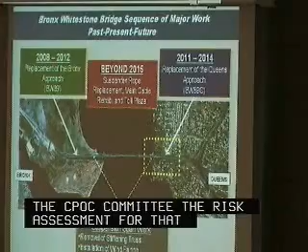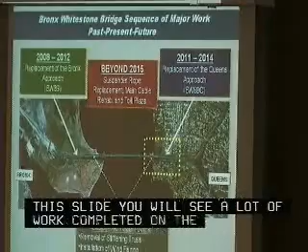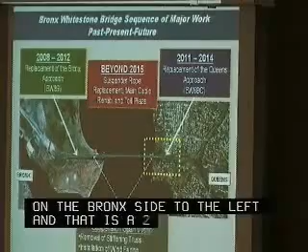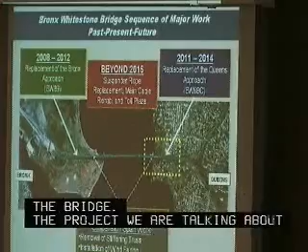First, some background on the capital program at the Bronx Whitestone Bridge, and just a snapshot of where we are. This slide illustrates where we've been in the past, what's going on right now, and where we're headed in the future. In the center of this slide, you see a lot of work was completed on the suspended span, the main part of the bridge, including replacement of the roadway deck, and other work related to reducing the weight on the cable, which was also very important for us structurally. Currently, you see the project on the Bronx side to the left - that's a $200 million project going on right now, replacing the Bronx approach structure on the Bronx side of the bridge. So the project we're talking about today is a very similar project, but on the Queens side of the bridge, in the area that's highlighted with the dashed lines.

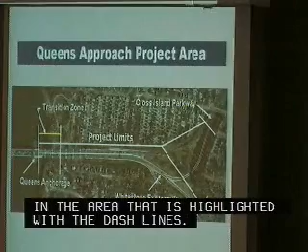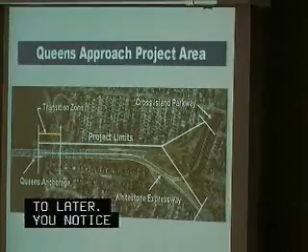This is an enlarged view of the project area. You see the project limits are bounded on one side by the Queens anchorage, and that's an important consideration because it represents a fixed constraint on the roadway width that is important in the staging and phasing of the project. There's a transition zone that's marked, which we'll get back to later. And you notice on the other side, the project limits interconnect with the highway system in Queens, the Cross Island Parkway, and the Whitestone Expressway.

A couple of things to note about this slide.

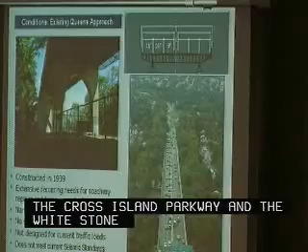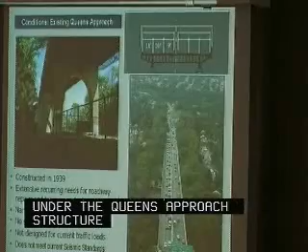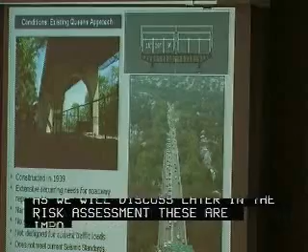You notice this is a shot of the current conditions out there. Under the Queens Approach structure, you currently have playgrounds, and you see a lot of trees and parkland on either side of the right-of-way. As we will discuss later in this risk assessment, these become important considerations that had to be addressed in the project, and indeed risks that have to be evaluated.

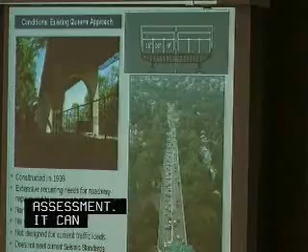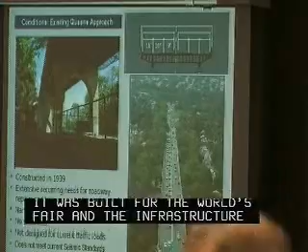And you see the bullets basically give you an overview on the need to replace the structure. It's a 1939 structure, built for the World's Fair, and with aging infrastructure everywhere, we have these kinds of problems.

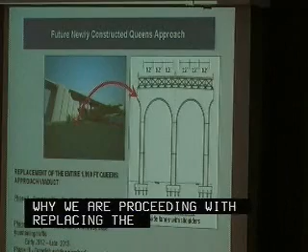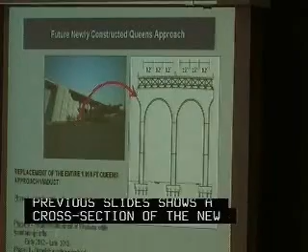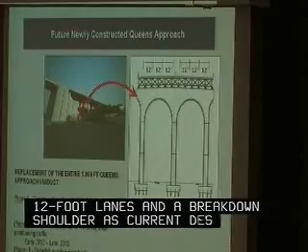This slide, in contrast to the previous slides, shows a cross-section of the new structure. You'll note it's a wider structure, without the lane width limitations. You have standard 12-foot lanes and a breakdown shoulder as per current design standards. You have a double-arched pier substructure system, which provides additional redundancy and resiliency to the structure.

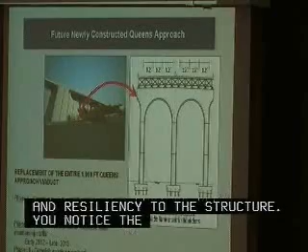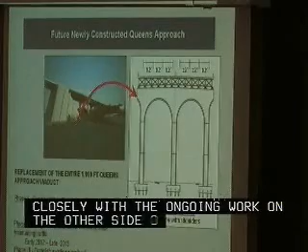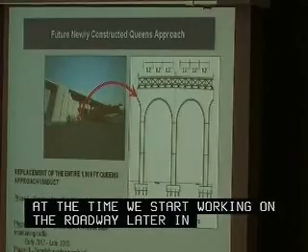And you notice the phasing of the project. It dovetails very closely with the ongoing work on the other side of the bridge, in that Phase 1 is really off the roadway underneath doing substructure work. By the time we start working on the roadway later in 2012, we'll be done with roadway work on the Bronx side of the bridge. And then we finish up with some site restoration work in 2014.

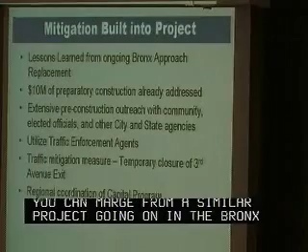So obviously this is a complex and challenging project. There's quite a lot of, in a sense, using the risk prism of looking at things, a lot of risk mitigation already built into the project. That's really where we've incorporated lessons learned, as you would imagine, from a very similar project going on the Bronx side. So in a sense that's an inbuilt mitigation already captured in the bid documents themselves.

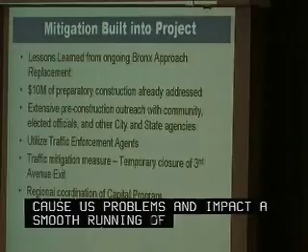The next bullet refers to some work we've incorporated in the project. On the Bronx side, the ongoing project, we've incorporated about $10 million of preparatory work on the Queens side, and that's really to address our concern about one of the major risks of dealing with this aging infrastructure: once we start saw cutting the roadway deck and doing some of the other demolition required for phased construction, there's a risk that the structure itself may cause us problems and impact the smooth running of the project. So to mitigate that risk, we've done a lot of pre-work to stabilize the structure and make sure we can move ahead smoothly with construction once we start.

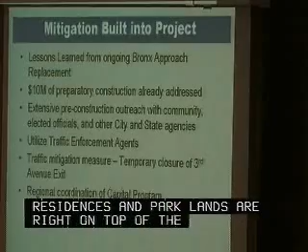Third bullet: as you may have noticed in the previous slides, the local residences and the parklands are literally right on top of the right-of-way. So obviously there's a big premium here on working very closely with the community to elicit their concerns and make sure those concerns are properly reflected in the contract documents. To that end, we've had an ongoing and proactive effort to work with community groups, community boards, civic associations, elected officials, and of course city and state agencies, most notably the Parks Department, which would be a big player in this project.

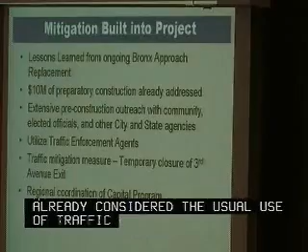And the last three bullets concern traffic mitigation, things we've already considered: the usual use of traffic enforcement agents to control the intersections of local streets, some temporary ramp closures, and the last bullet refers to the fact that these projects have really been synchronized with the work at the Throgs Neck Bridge, since this is really a common transportation corridor.

Next slide. Joe, I have an eye on the clock, so you're going to have to pick up the pace a little bit if we're going to get to the finish line. No problem.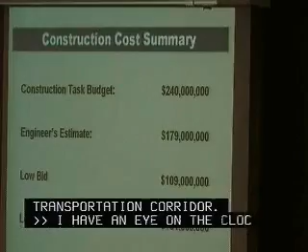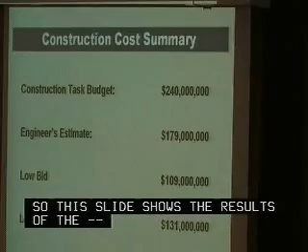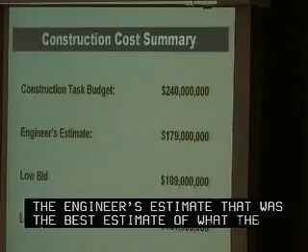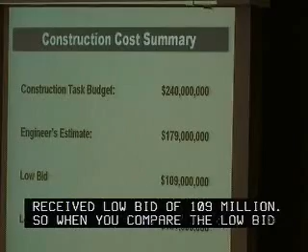And so this slide shows the results, the key numbers. The original construction budget was $240 million. The engineer's estimate, the best estimate of what the bids would be prior to bid, was $179 million. And you'll note the dramatically low bid we received, of $109 million. So when you compare the low bid to the budget, you see a delta of $131 million.

Normally we run these risk assessments prior to bid, so we have to deal with market uncertainty and a lot of other risks. Here we had the luxury, because of time, of running a risk assessment post-bid with the benefit of the bid results. And here you see the results of that post-bid analysis.

Basically, you see the low bid of $109 million, and we assessed the 80th percentile probability risk as a $21 million increase to the construction cost, and total project cost a $27 million increase.

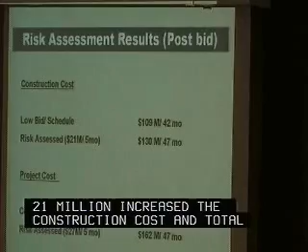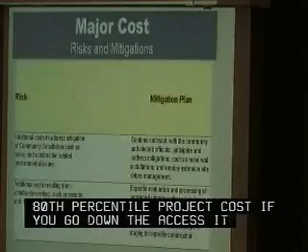As we move into construction, not all of the risks are mitigated. We will continue to have to deal with some of the risks that I spoke about. The outreach and proactive effort with community and local officials and electeds will have to continue to address potential issues that may come up, such as noise walls that the community may want built, more restrictive terms and conditions on the contractor for noise, dust and other nuisances. Our mitigation plan there is to be very proactive and continue to work with the community and elected officials and deal with these issues very timely.

Additional costs in general, the construction risks, security issues, regional traffic issues - these are other risks. Our plan to deal with these risks is to address these issues very timely, to stay on top of them, and to work very closely with all concerned to get prompt resolution, and make necessary adjustments to the phasing, staging, and traffic plan.

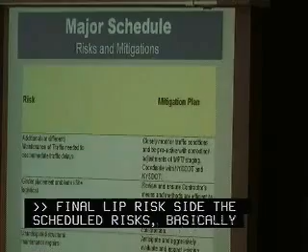And finally, on the risk side, the schedule risks, basically similar - the potential of impacts due to regional traffic issues. The second bullet refers to some issues we've encountered on the Bronx project, where the site logistics made it very difficult to pick and lift the new steel into place. So we're going to deploy a lot of the lessons we've learned on the Bronx project on the Queens side to hopefully mitigate that risk.

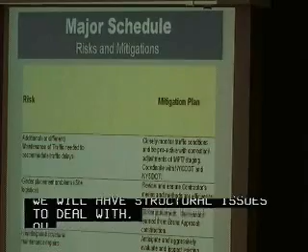And finally, as I mentioned before, we're dealing with an old and somewhat fragile structure, so it's to be expected we're going to have unanticipated structural issues to deal with. Our plan there is to be very proactive with inspection, monitoring of the structure, additional intensive biennial inspections, and so forth, so that we stay on top of emerging issues with that risk.

And finally, where we are today - we have the bid results, we've now completed the risk assessment. We're in the process of setting up the contractor qualification hearing, completing bid analysis, and hopefully within the next couple of months we'll be able to get this project awarded. Thank you for your attention.

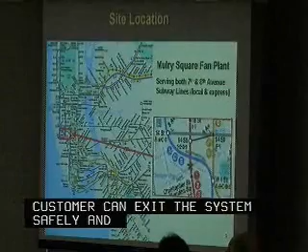This fan plant will cover two tunnel segments: the IND B division A, C, and E from 14th Street to West 4th Street, and the IRT A division number 1, 2, and 3 from 14th Street to Christopher Street.

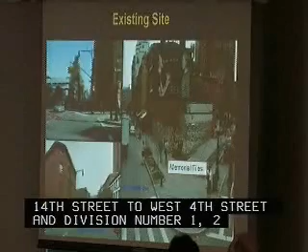Here is our fan plant site, the triangle area owned by New York City Transit, located at the southeast corner, Greenwich Avenue to the left, 7th Avenue to the right. As you can see, the top left corner is St. Vincent Hospital, which is across our project site, and down below is Greenwich Street looking north.

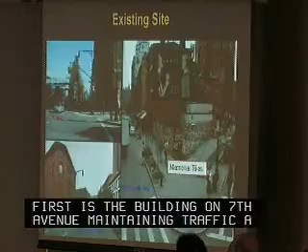We have a few challenges here. First is building the plenum, an underground plenum, both on Greenwich and 7th Avenue, while maintaining traffic at the street level as well as the trains down below. The plenum is the air pathway that connects the fan plant and our subway tunnels. This area is also a historical district, so we have many more challenges to deal with during construction.

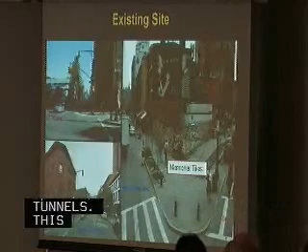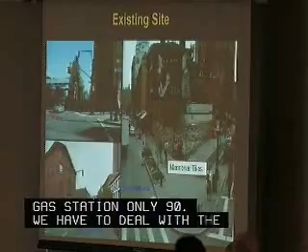This location itself used to be a gas station in the early 90s, so we have to deal with the gas stations and underground tanks, which we have to remove. You can also see the 9/11 memorial tiles, which we need to preserve, as well as the 100-year-old building with the billboard next to our fan plant site. The settlement of this building is something we need to deal with as well.

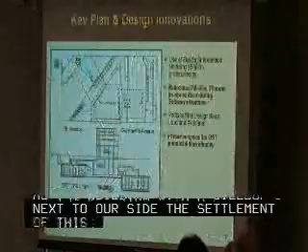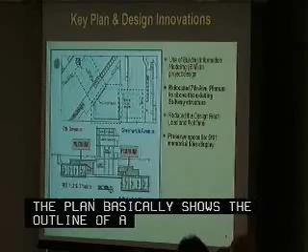Here's the plenum I just talked about. The key plan basically shows the outline of our construction. The fan plant is at the middle.

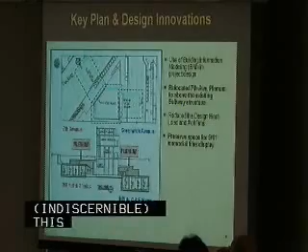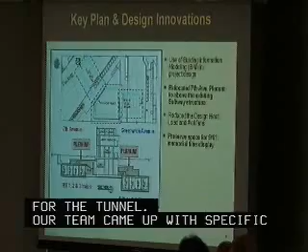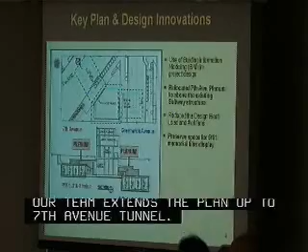The plenum is extended on both sides to serve the respective tunnels, both the IRT and the IND. This area is actually the high priority area for our IND tunnel. Our design team came up with very specific innovations, mainly the 7th Avenue plenum. The fan plant located at the middle is positioned such that we can pick up the IRT tunnel segments. Our team simply extended the plenum to 7th Avenue to cover the IRT tunnel. This gives extensive savings in terms of not having to have a separate IRT fan plant in the future, and it realizes significant savings in this project, which we'll see down the line.

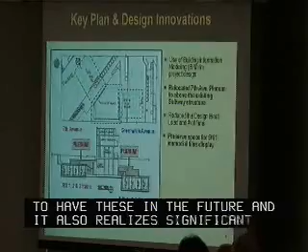Take, for example, testing and acceptance. It used to be a very difficult one. Now we have clear criteria in our spec. We have a shakedown process conducted by our commissioning group, supported by our user department. Also, the fan plant program is currently being done by in-house engineers.

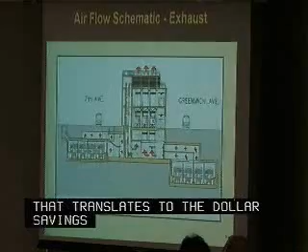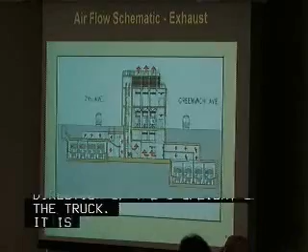Here is the purpose of the fan plant. You're looking at the air exhaust to the street; the opposite direction would be the supply to the track. The fan plants are controlled from the rail control center. Depending upon the location of the fire, the RTO can exhaust smoke from the tunnel or supply fresh air to the face of our customer.

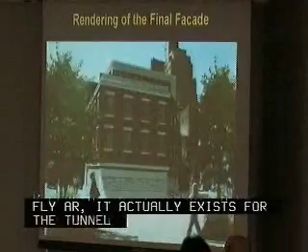Here is what the fan plant will look like once completed, from the street level. It's actually 30 feet deep and 43 feet high to match the neighboring buildings. You can see the provision for the 9/11 tiles here. This facade design was incorporated with input from the community, elected officials, as well as the Landmark Commission.

Last year, transit hired an independent consultant to do a risk assessment. We had a couple of kickoff meetings last year, followed by a couple of days of workshops, where all the stakeholders from New York City Transit, as well as representatives from MTA, attended this process. We wanted to confirm our confidence level to 80% on a project cost of $89 million and a construction duration of 40 months.

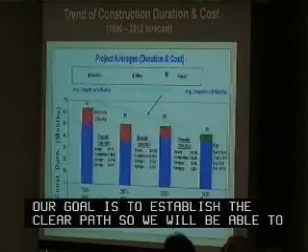Ultimately, our goal is to establish a clear path so that we can deliver a safely built, quality project on time and within budget. As I said, we have come a long way. This is the trend of construction duration and cost since 1990 to now.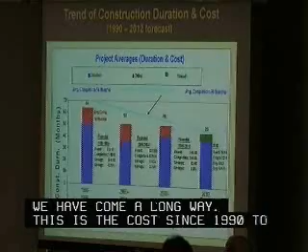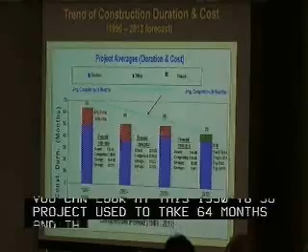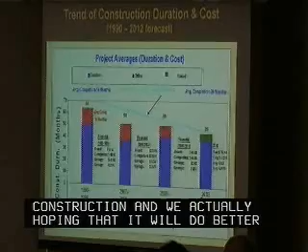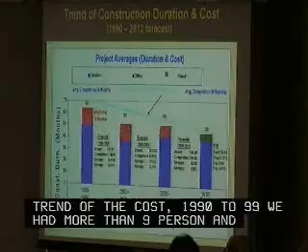From 1990 to '99, the average construction project used to take 64 months with 14 months of delay. That is now an average of 39 months. This is spending on Jackson Avenue, currently in construction, and we're hoping to do better, actually in 35 months. Looking at the trend of cost, from 1990 to '99 we used to overspend more than 9%, and gradually we're improving. We're actually saving now; we are projecting 6% savings on Jackson Avenue, currently in construction.

One risk item I'd like to mention is the settlement risk for a 100 year old building with a billboard. We learned from the Second Avenue construction and actually hired the same experienced consultant they used to address a similar situation. Currently our legal team is working with the building owner and his attorney to gain us access so our consultant can do a structural assessment and test, and the design solution will be included in our contract drawings.

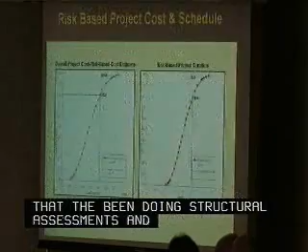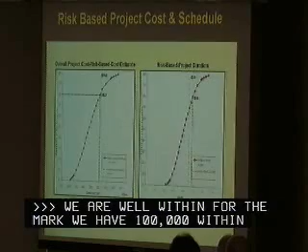As you can see, we are well within the 80% mark. We are actually $100,000 within our projected budget cost, and within a couple weeks of our schedule.

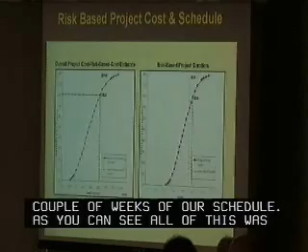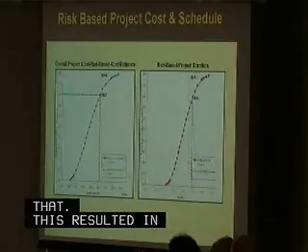So as you can see, all of this was possible due to our implementation of lessons learned and our mitigations. All this innovation, we did that, and these resulted in quality designs. Most of it has actually been implemented during design, so therefore we see this kind of result here.

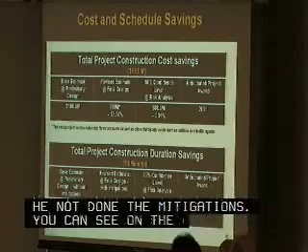We have seen our confidence levels along the way. We saved a significant amount of money, $19.5 million, and 15 months had we not done these mitigations. So from the base estimate to the designs, we have $19.5 million and 15 months.

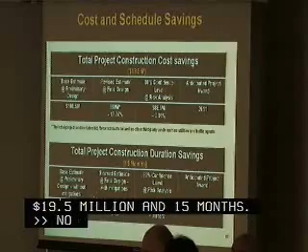Plus you're ventilating two different subways. That is correct. As I mentioned, the Jackson Avenue, we're actually doing one fan plant serving three existing lines, and a fan plant serving three different lines actually.

Thank you. Thank you. Thoughts, questions? It's completed. What percentage of the time do you actually expect it to be running?

Only during emergencies. There won't be planned utilization of it. It'll cover emergencies that could occur between 14th Street and Christopher and West 4th, coming down on the IND or on the A division. So if there was a smoke event in either one of those two lines, this plant would be turned on and utilized to address the smoke event, but no scheduled usage of it.

In your design, you have noise mitigation. I mean, was it just in that diagram? But presumably you're still pumping smoke out the top, right? Yes. And you're not going to do it very often, and it's an emergency. Yes. I mean, how much?

I mean, can't you just have people suffer a little bit more? If it's an emergency, they're going to be breathing smoke through their windows if they have to shut the window. I'm just wondering, given the emergency nature of the installation and the fact that you're concerned about moving a lot of air quickly in an emergency, on the other hand it doesn't have to be as tolerable as something that was going to routinely be going on. Whether that's something we really take into account in our specifications, I think Tom wanted to say something. I don't think the cost of the... what is the cost of the attenuator?